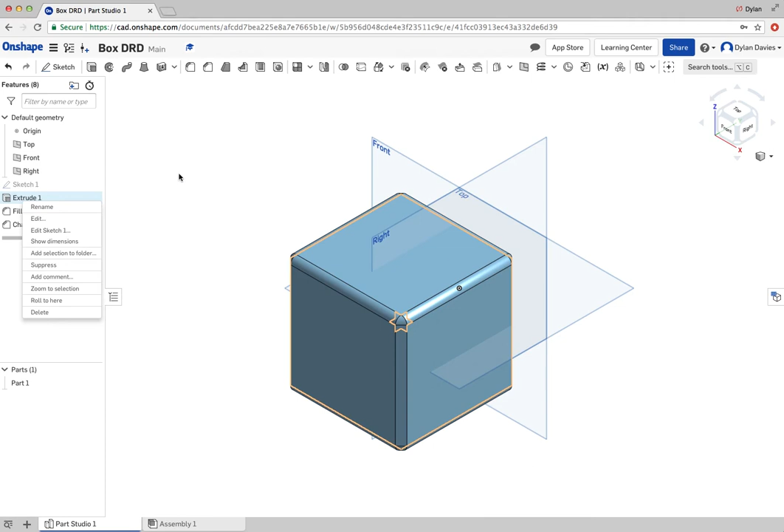Okay, so I've done my fillets and chamfers. I'm now going to show you one way of producing a hole in this surface here. So if you remember, I said you can go back and edit any of these features. So if I wanted to change the sketch or the extrude or the fillet, I just right click and press edit. So I'm going to go back and edit my initial sketch.

So if I click edit, I've gone back to my sketch view, and to make it easy for myself, I'm going to click on front and I'm going to draw a center point circle. Okay, so that's already set to circle. I've got another two different circles that I can select there. So center point circle, click and drag out. So it doesn't matter for the size originally, as long as I have snapped it to the center.

That's quite a good point actually to pick up on. When I'm drawing, quite a lot of products are set up so that they're symmetrical. If you think about your phone, it will have a center axis, which is this point here. And in some products, maybe even a horizontal axis, and everything is centered around those points. So when I'm drawing most products, not everything, and I want there to be symmetry, I try and get it to snap to the horizontal running across here and the vertical axis running down.

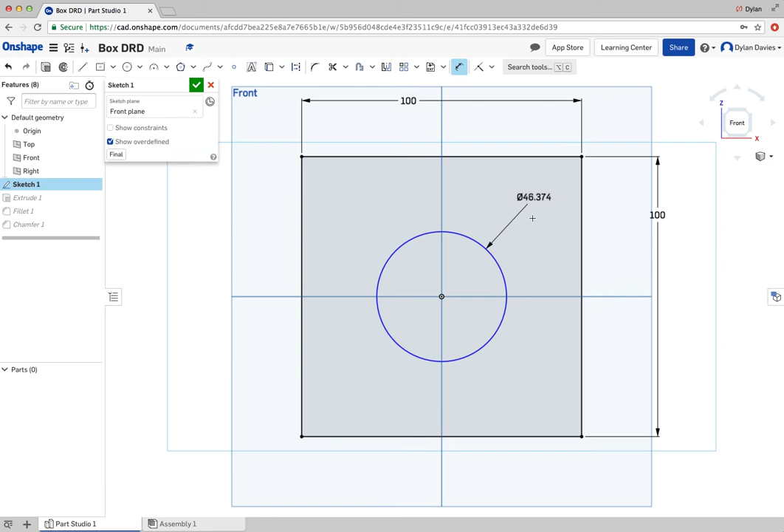So I'm going to add a dimension now to the side of this circle. So to dimension a circle, click on the edge and drag out. Okay. At this point, it's probably worth noting, when you are dimensioning, don't drag them over so that it's all complicated and you can't view it. Click somewhere where you can easily make changes and you can see the values. So I'm going to change that to 50 and press green tick. Okay, now, sorry, enter I'm going to press first of all.

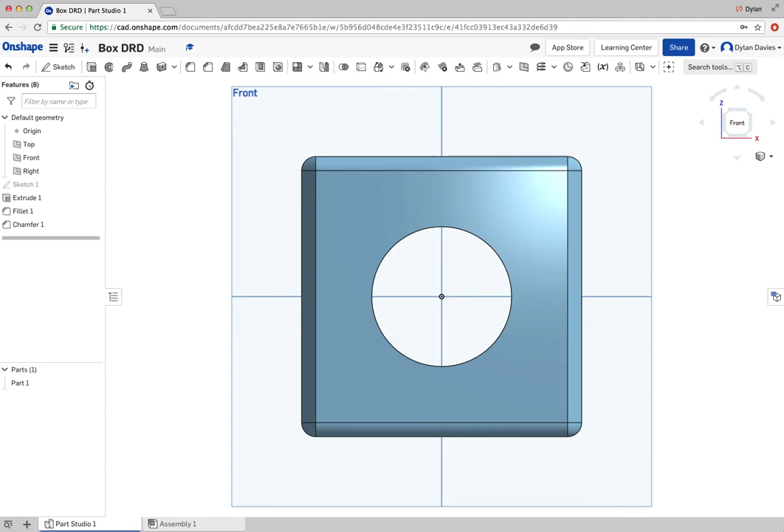When I press green tick, if you think about what's going to happen, the sketch was the first thing that I've done, and I'm going to edit the first thing that I've done. So when I press green tick and view it in isometric, you'll now see that the cube has got a hole running through it. That's one way of doing it.

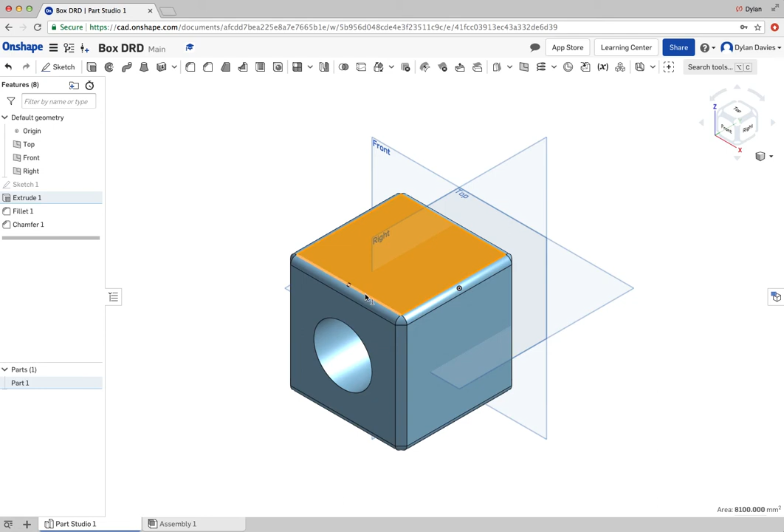Now, if I was going to do it from the top surface, because I don't have a sketch on the top surface, I can't do the same sort of technique there. So instead, I'm going to select the face. So rather than select one of the planes now, I'm going to select the face and draw on one of those faces. So if I click on sketch, you'll now see that the next sketch has appeared down here. And because I am on that face there, I can click on top there.

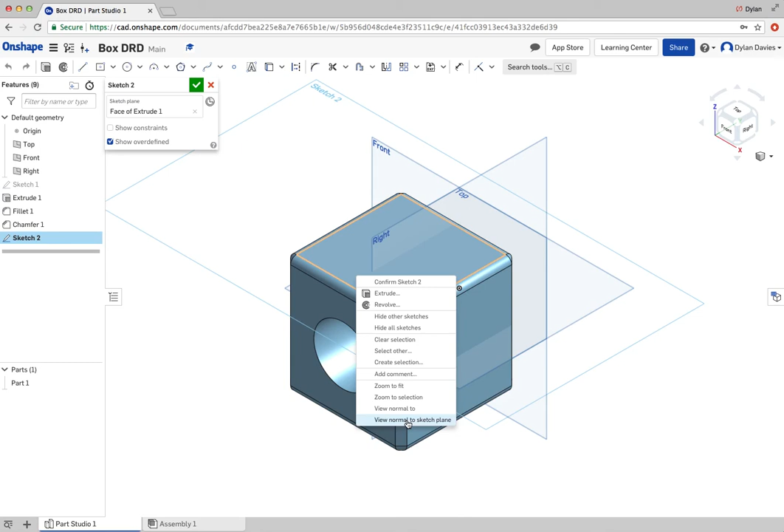But another way of orientating it is if I right click and click on View Normal To, or I can click on View Normal To Sketch Plane because I've just created that sketch plane. But I'm going to click on View Normal To. Okay, so it's got that face there that I've previously clicked on. And now I'm going to draw a center point circle centered in the vertical axis.

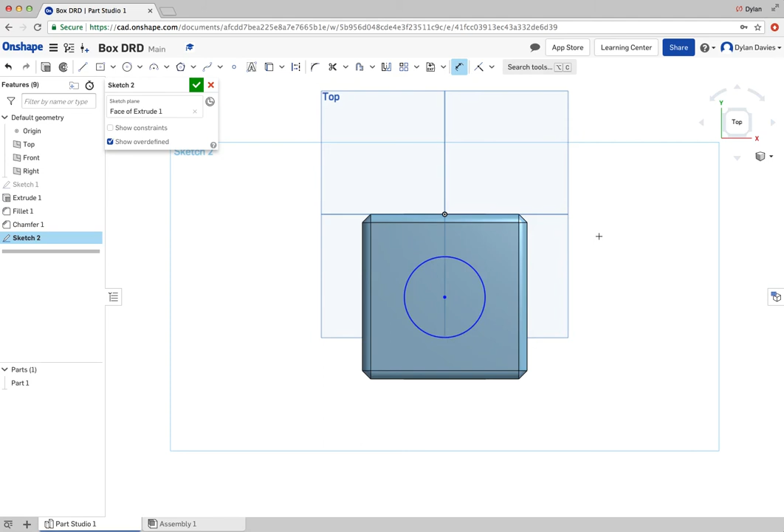And let's give that the same dimension. So if I click on the outside of the circle, change that to 50, and press enter. Now you'll notice I haven't got a horizontal plane running across there. So to keep things easy, I made this 100.

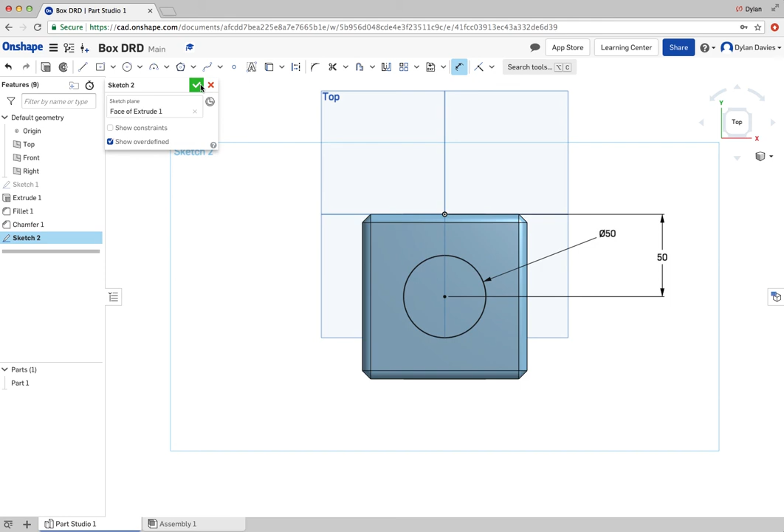So to find the center, I click on the center point of the circle and the top edge of my cube, drag it out, don't allow it to go at a funny angle, and change that to 50. I now know that it has been locked into position because that's where I snapped it on the vertical axis, and I have centered it by adding a second dimension from the center of the circle to the top edge. Press green tick. So my sketch is done.

But what I now need to inform the model of is to produce either an extrude or an extrude cut. So I'm going to just show you the two differences. If I click on extrude, as I've done when I first created the cube, and select that sketch, that has now produced that.

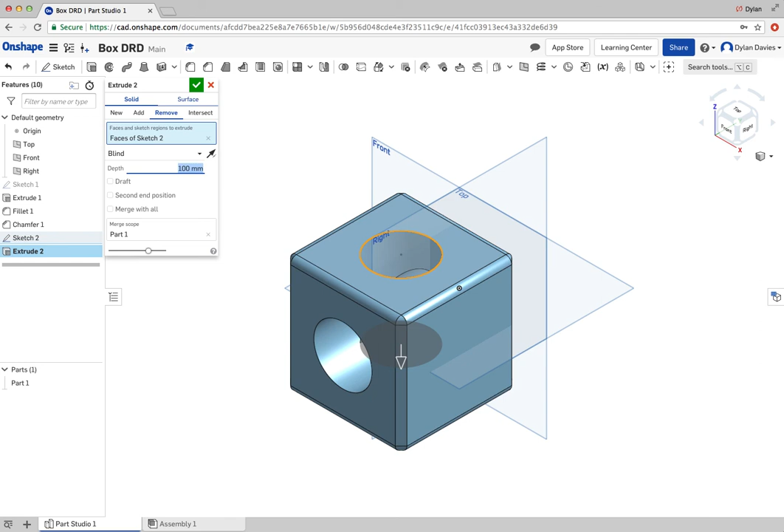But because I want to remove it, I click on remove, and I can drag this arrow down, or I can enter in a dimension. So I enter 100, press enter. You'll now see that I've got a hole running through. Press green tick, and there you go. That's how I do a cut or produce a hole.